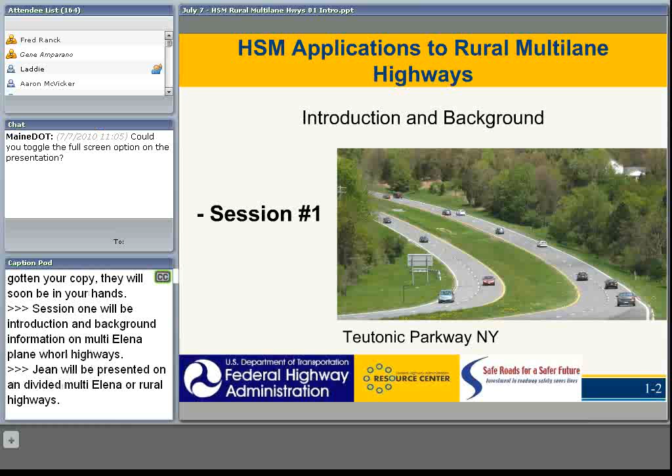Session 1 will be introduction and background information on multi-lane rural highways. Our 2 presenters today are myself, Fred Ranck, from FHWA's Resource Center, and Gene Amparano, who will be giving the following session on undivided rural multi-lane highways. Our learning outcomes for the first module are to review the crash frequency safety performance of rural multi-lane highways and to define for you substantive safety, a concept that goes beyond nominal safety as we've always thought of it.

Gene, could you please advance the slides and tell me which one you're advanced to? If you go to slide 5. We're on slide 5, okay. I was experiencing a real slow internet connection, my apologies to those of you on the webinar.

Multi-lane highways are a very small portion, less than 1 out of every 5 miles of U.S. highways. They constitute a small amount of the U.S. federal aid mileage, not a large share at all.

Fred? Yes, I'm bringing up, I'm with Gene. I've totally lost the internet connection here, so I'm going to call on you to advance the slides as soon as I can get up and see them in my hand here. Just say next and I'll advance the slide. Sure.

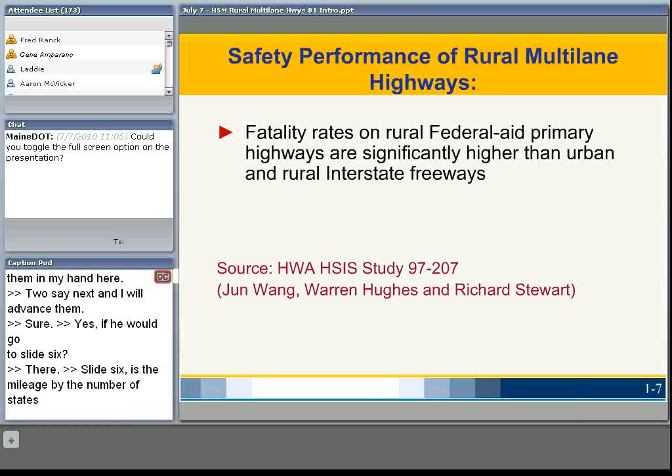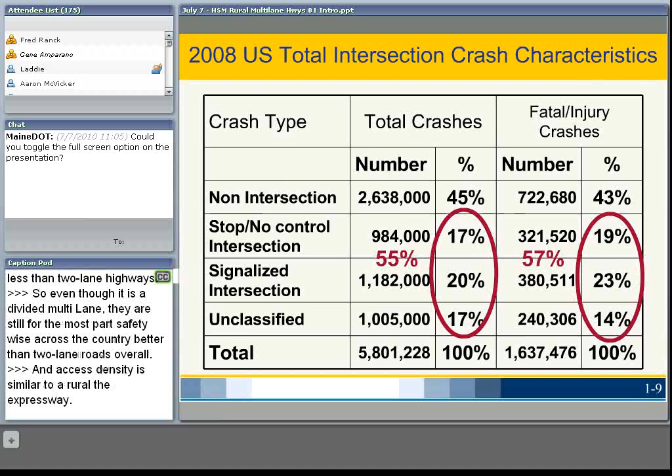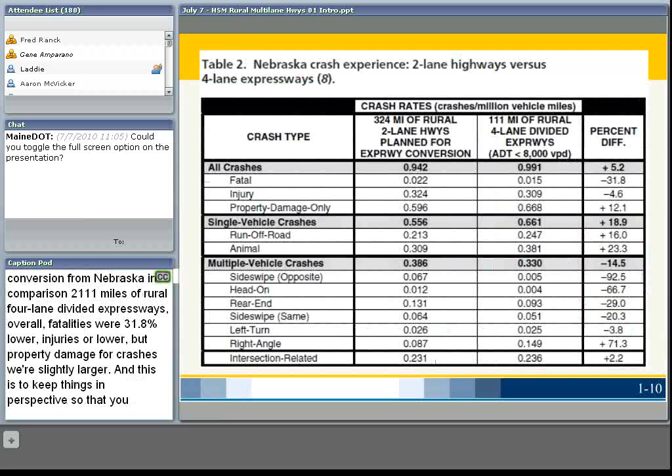Slide 10. A comparison from NCHRP 650 shows crash rates for 324 miles of rural 2-lane highways planned for expressway conversion in Nebraska, compared to 111 miles of rural 4-lane divided expressways. Overall, fatalities were 31.8% lower, injuries were lower, but property damage crashes were slightly larger. This helps keep things in perspective so you understand how they relate to the performance of other roadways.

Our knowledge as engineers and transportation professionals remains imprecise. Judgment is essential. Meeting the standard of your design standards or the MUTCD does not necessarily make a highway safe. Some important features of highways are not determined by standards, such as the spacing of interchanges or intersections, for J-turns, or angled positive offset left turn lanes. All of these things are not typically found in our national standards.

On the left-hand side, we've typically thought in the past, up until about the mid-1990s, of safety as complying with the minimum requirements of our design standards for things such as vertical curvature, horizontal curvature, cross slope, super elevation, length of tangents, and tapers. As long as we met those, a road was thought of as being nominally safe - in other words, safe in name only.

Since the mid-1990s, a different way of looking at safety and crash frequency performance in a more progressive manner has evolved, and we call this substantive safety. Substantive safety is the expected or actual crash frequency or severity for a piece of roadway or highway.

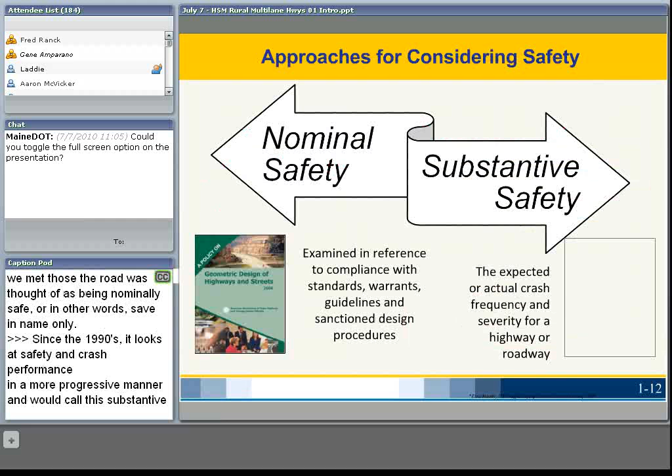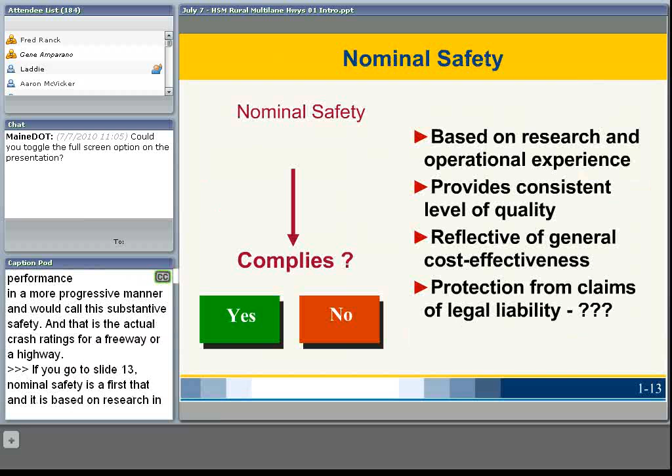Go to slide 13. Nominal safety is a first step, and it's based on research and our past experience in the United States, and what has built our design standards to be what they are today. I'd like you to think of it as a first step: do you meet the minimum values? Do you comply with the minimum requirements of your design standards?

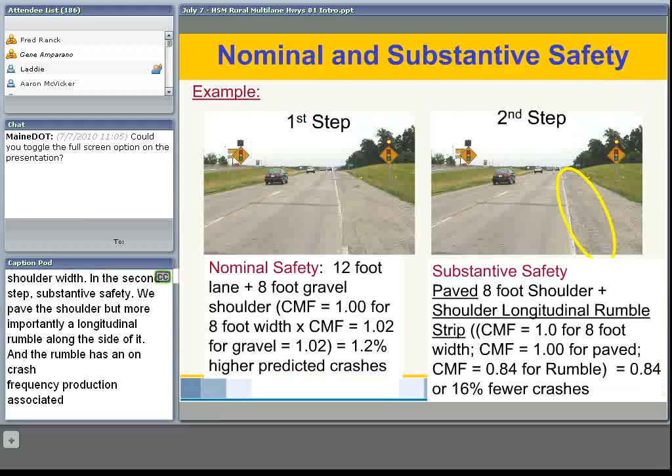Go to slide 14. In the first step, nominal safety, looking at this divided 4-lane piece of highway in Missouri, US 54, we have 12-foot lanes and 8-foot gravel shoulders, and we would typically think of this as meeting all the nominal requirements for lane width and shoulder width. In the second step, substantive safety, we pave the shoulder, but more importantly, we add a longitudinal rumble strip along the side of it. Rumble strips have a known crash frequency reduction of about 16% fewer crashes. Going beyond nominal, such as installing a longitudinal rumble, can reduce crash frequency.

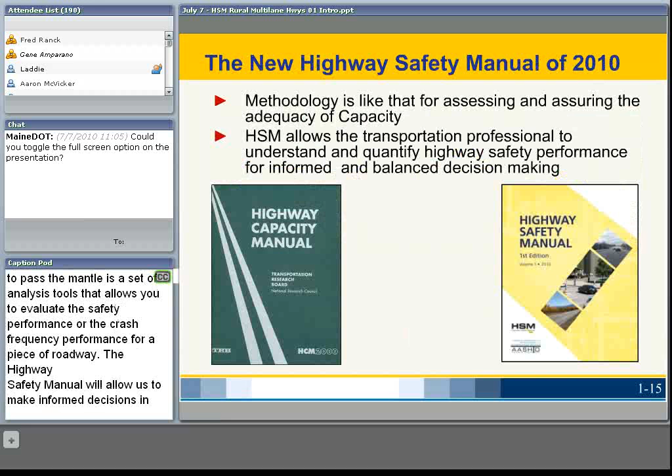Slide 15. The new Highway Safety Manual of 2010 has a methodology a lot like that of the Highway Capacity Manual. The Highway Safety Manual is a set of analysis tools that allows us to evaluate the safety performance, or the crash frequency performance, for a piece of roadway. The Highway Safety Manual will allow us to make informed decisions in terms of what types of designs will result in differing crash frequencies. It allows for more balanced decision making.

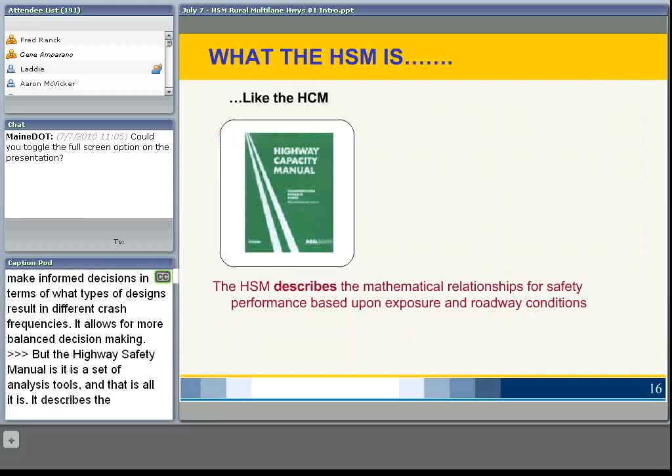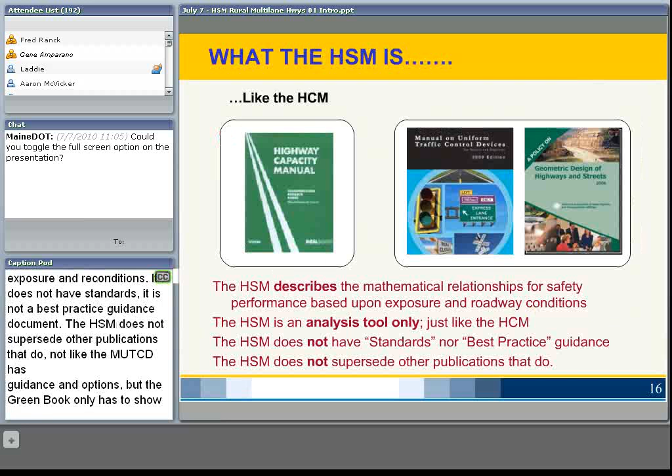Go to slide 16. The Highway Safety Manual is a set of analysis tools, and that is all it is. It describes the mathematical relationships for safety performance based on exposure and roadway conditions. It does not have standards. It is not a best practice guidance document. The HSM does not supersede other publications that do - it is not like the MUTCD nor the Green Book. The MUTCD contains standards as well as guidance and options. The Green Book has only 4 standard or 'shall' requirements, and the remainder of it is guidance in terms of design of a facility.

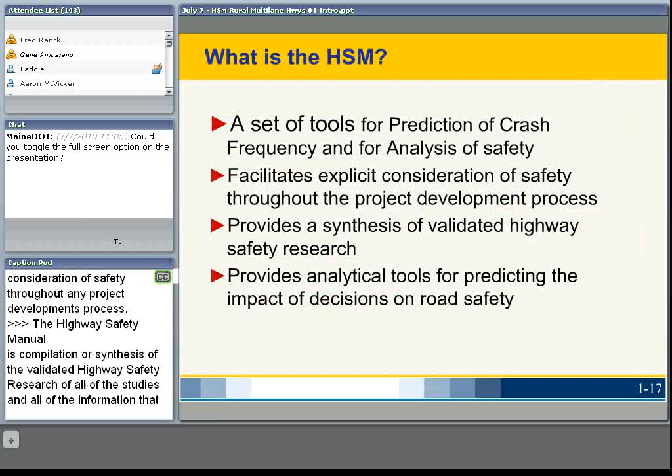Slide 17. So the Highway Safety Manual is a set of tools for the prediction of crash frequency and for the analysis of safety. It facilitates explicit consideration of safety throughout any project development process. The Highway Safety Manual is a compilation, a synthesis of the validated highway safety research of all the studies and information available to you, the transportation professional. It provides analytical tools to predict the impact of decisions on road safety. Slide 18. So the Highway Safety Manual contains the best of the known science of safety and research.

We have for some time been able to evaluate and quantify environmental impacts such as number of acres of wetlands disturbed. Operationally, we can compute levels of service and total delay for an intersection project. We can certainly do the economic analysis on costs and benefits, but what we haven't been able to do until the advent of the Highway Safety Manual is to be able to quantify safety performance.

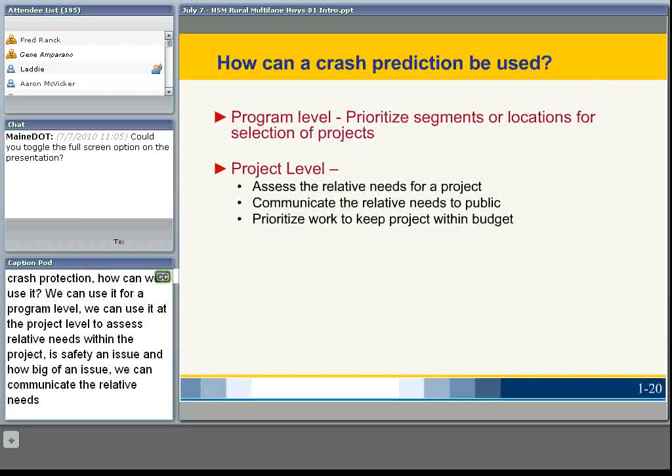So quantifying safety for crash prediction, how can we use it? We can use it at the program level to prioritize segments or locations. We can use it at the project level to assess relative needs within a project. Is safety an issue? How big of an issue? We can communicate the relative needs in terms of crash frequency performance to the public, and it provides an excellent way of supporting documentation for design exceptions.

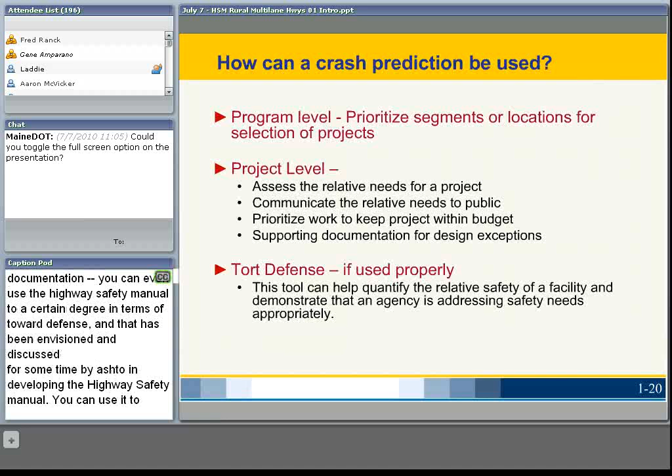You could even use the Highway Safety Manual to a certain degree in terms of tort defense, and that's been envisioned and discussed for some time by AASHTO in developing the Highway Safety Manual. You can use it to quantify the relative safety of the facility and demonstrate that an agency is addressing safety needs appropriately.

FHWA has made it a policy, in the form of a program memorandum, that safety be fully considered in every aspect of planning, programming, environmental analysis, project design, construction, maintenance, and operations, and FHWA acted to do that back in January of 2005. So the methods, the methodology, and the results of the Highway Safety Manual should be incorporated into the work of your agency as you develop a project and make decisions.

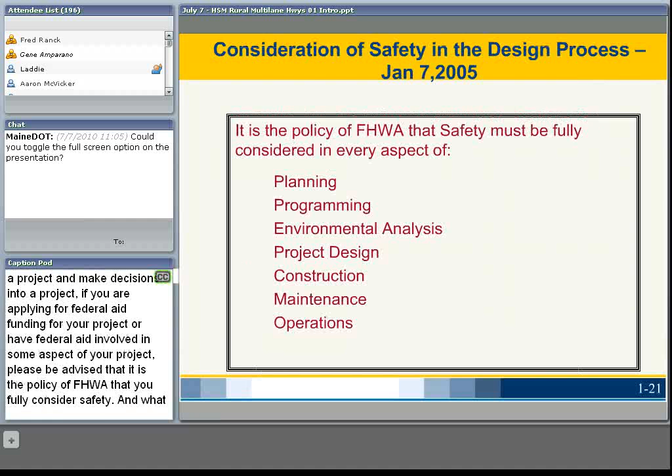If you're applying for federal aid funding for your project, or have federal aid involved in some aspect of your project, please be advised that it is the policy of FHWA that you fully consider safety. In terms of that, what that means is to use the methodology and the proven analysis techniques of the Highway Safety Manual to quantify it.

Balancing safety with many other factors is critical to good design decision making. With being able to quantify safety, we can now bring it into the balance of how decisions are made overall in the project.

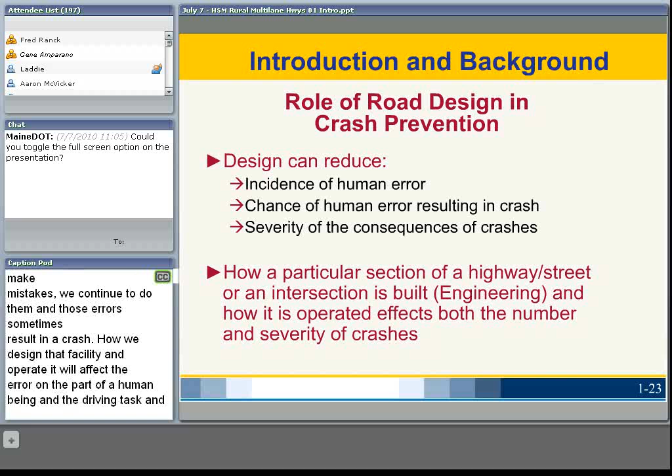The role of road design in crash prevention: design can reduce the incidence of human error. Humans will always continue to err in the driving process. The human brain is a parallel processor, and inherent in parallel processors is branching to not the same decision reliably all of the time. We know that drivers make mistakes, they continue to do them, and those errors sometimes result in a crash. How we design a facility and operate it affects whether that error on the part of the human being in the driving task results in a crash, and how severe that crash will be.

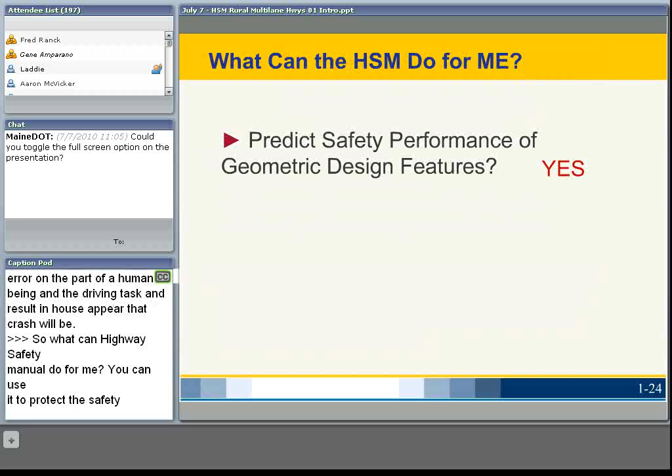So what can the Highway Safety Manual do for me? You can use it to predict the safety performance of geometric design features such as shoulder width, side slope, and access. You can use it to quantitatively calculate safety effects, and to predict safety performance for intersections in terms of crash frequency and the effects of countermeasures. You can use it for better decisions for safety, and that's what we're seeking with the Highway Safety Manual and its deployment.

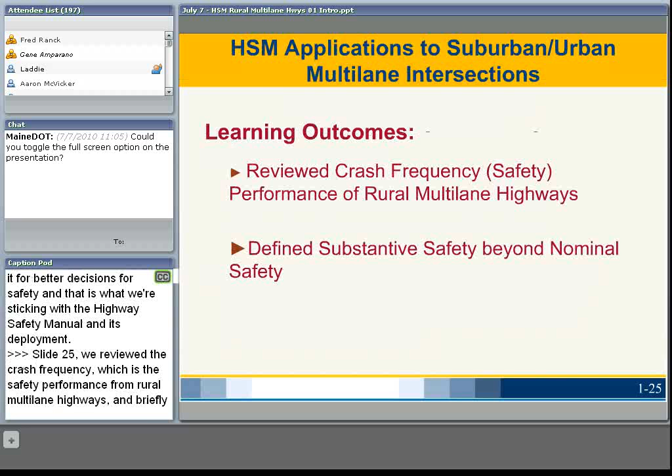We reviewed the crash frequency, that is the safety performance, for rural multi-lane highways, and briefly covered the new term, substantive safety, which goes well beyond previous thinking, which we'll identify as nominal safety.

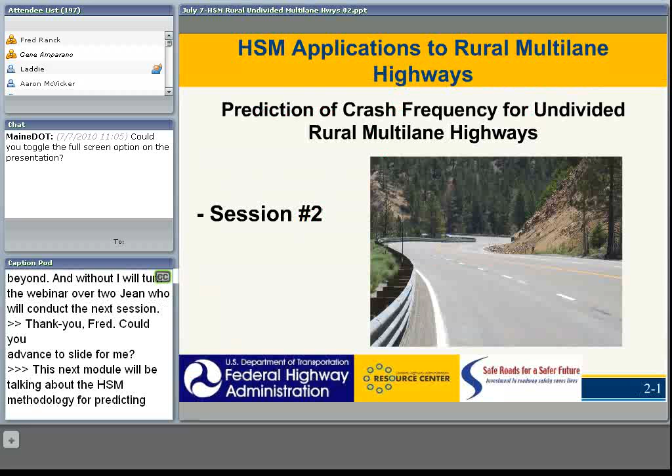And with that, I'll turn the webinar over to Gene Amparano, who will conduct the next session. Thank you, Fred. You want to advance the slides for me? Okay, I was just teasing you, Fred.

This next module, we're going to be talking about the HSM methodology for predicting crash frequency for undivided rural multi-lane highways. We're going to describe the base models, better known as the safety performance functions, that are used to calculate this predicted crash frequency. We're also going to describe and look at the crash modification factors associated with rural undivided multi-lane highways, and show you through demonstration how to apply the crash modification factors.

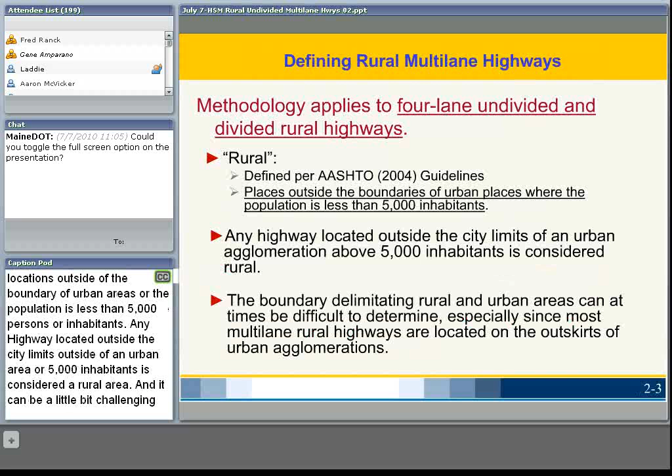First, we want to define what a rural multi-lane highway is. Rural is defined as locations outside the boundaries of urban areas where the population is less than 5,000 inhabitants. Any highway located outside the city limits of an urban agglomeration above 5,000 inhabitants is considered a rural area. It can be a little challenging to differentiate between rural and urban areas in some places, but usually they're on the outskirts of urban agglomerations.

Multi-lane facilities usually have 4 or more lanes with a continuous cross-section. They may be divided or undivided, with a rigid barrier or flexible barrier, or just a paved or landscaped median. They should not have access or egress limited by grade-separated interchanges, meaning they should not be freeways, but occasional grade-separated interchanges are acceptable as long as they're not the primary form of access.

There are some limitations on the methodology. The Highway Safety Manual covers a lot of geometric and traffic control features, but not all. As you go through your copy of the Highway Safety Manual, once you get it, you will see that there are some areas that are lacking, that are not addressed with a crash modification factor.

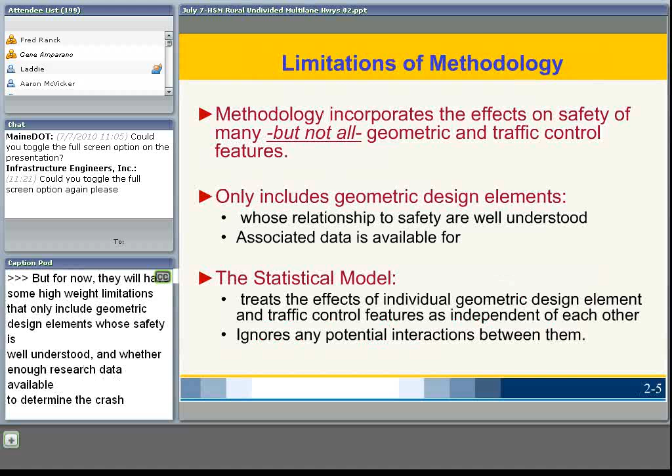But the Highway Safety Manual is a living document, similar to the MUTCD and the Highway Capacity Manual. As research advances, there will be more crash modification factors that come on board to be included in future editions of the Highway Safety Manual. But for now, we have some limitations. It only includes geometric design elements whose relationship to safety are well understood and where there's enough research data available to determine those crash modification factors.

It treats the effects of individual geometric design elements and traffic control features as independent of each other, and it ignores any potential interaction between them.

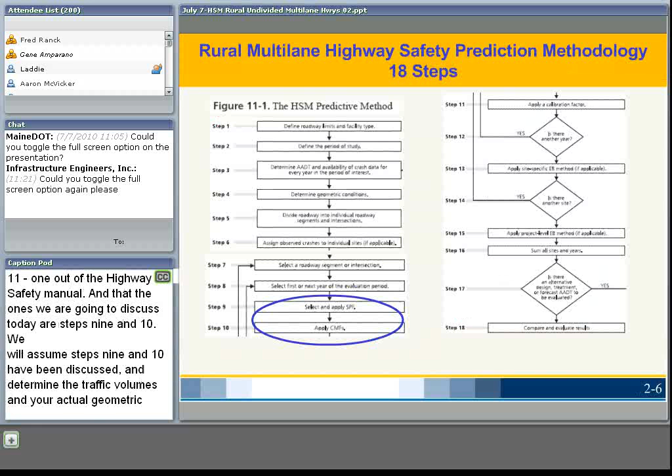The crash prediction methodology consists of 18 steps. This happens to be Figure 11-1 out of the Highway Safety Manual. Basically what we're going to discuss today are steps 9 and 10. We're going to assume that steps 1 through 7 have already been completed, which means defining the roadway limits, defining the study period, determining your traffic volumes and your actual geometric conditions, and observing the data. We're assuming that's already taken place.

The following steps after steps 9 and 10 have to deal with calibration. There is a calibration sequence in Appendix C of the Highway Safety Manual that walks you step by step on how to calibrate. If you were able to participate in the first webinar on June 14th, we showed the process that's used for calibration, and a copy of that presentation is available at the conclusion of today's webinar.

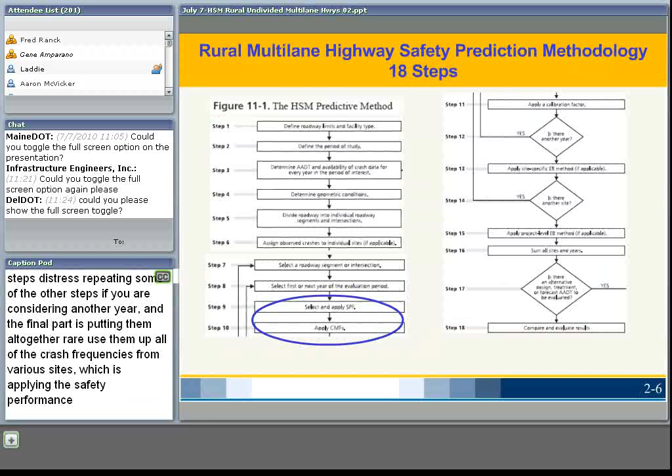The remaining steps just repeat some of the earlier steps if you are considering another year or another site, and the final part is putting it all together, where you sum up all your crash frequencies from various sites. But today we're going to be focusing on steps 9 and 10, which is applying the safety performance functions and also applying the crash modification factors to a rural multi-lane highway.

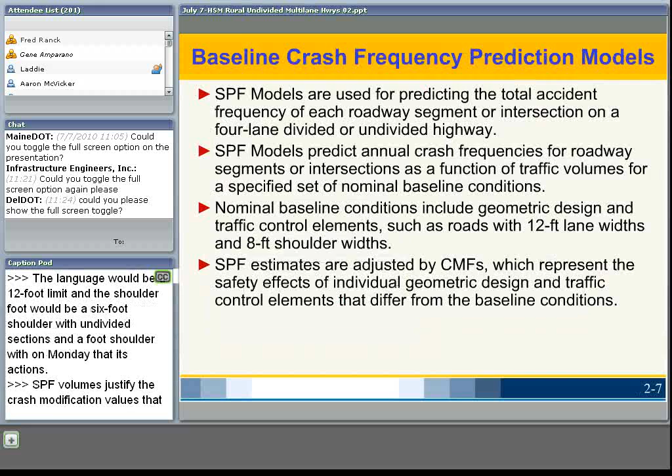The SPF models, or safety performance functions, are used for predicting the total accident frequency on a roadway segment. The prediction is determined in crashes per year. They're based on a set of nominal baseline conditions for geometric design and traffic control elements, such as for lane width, the base condition would be a 12-foot lane width, and for shoulder width, it would be a 6-foot shoulder width on undivided segments and 8-foot shoulder width on divided segments.

SPF values, or the estimates, are adjusted by the crash modification factors, which represent the safety effects of individual geometric design and traffic control elements that differ from the baseline conditions.

The first thing we have to do in order to analyze a segment of roadway is to divide it into homogeneous highway segments and also into intersections. Intersections will be covered in a webinar next week for rural multi-lane intersections. We'll cover that next week on July 13th. So if you're available, you can sit in on that presentation. But today we're going to be covering highway segments.

The definition of a highway segment can occur anywhere along a roadway, but if it happens to be between two intersections, then the segment should begin and end at the center of each of those intersections.

There's also a way to distinguish crashes with respect to roadways. They can be determined by the physical limits of the intersection, such as the curb radii or the crosswalk limits, where all those crashes that occur in Area A would be considered intersection-related crashes, and areas outside Area A, which is Area B, would be considered segment-related crashes.

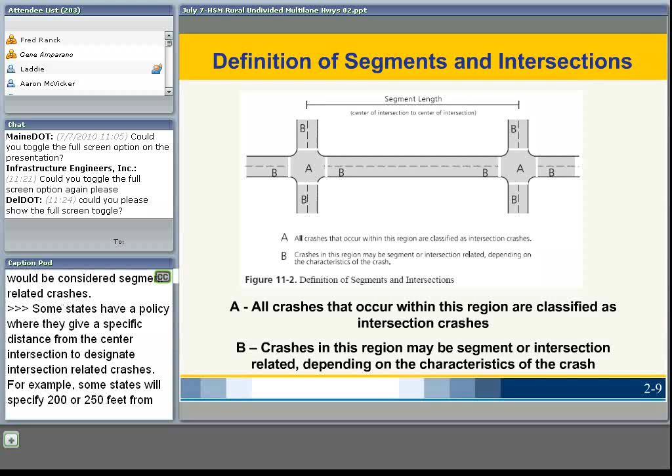Some states have a policy where they give a specific distance from the center of the intersection to designate intersection-related crashes. For example, some states will specify 200 or 250 feet from the center of the intersection to be classified as intersection-related crashes.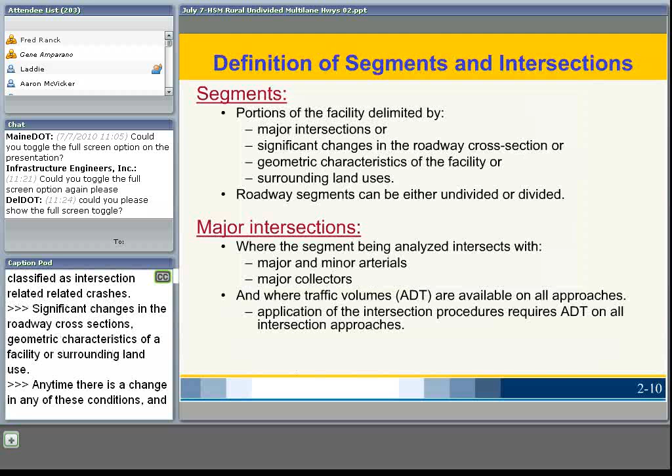Segments are the portions of the facility delimited by major intersections, significant changes in the roadway cross section, geometric characteristics of the facility, or surrounding land use. So anytime there's a change in any of these conditions, then you would want to break it out into a separate segment. Again, roadway segments can be divided or undivided.

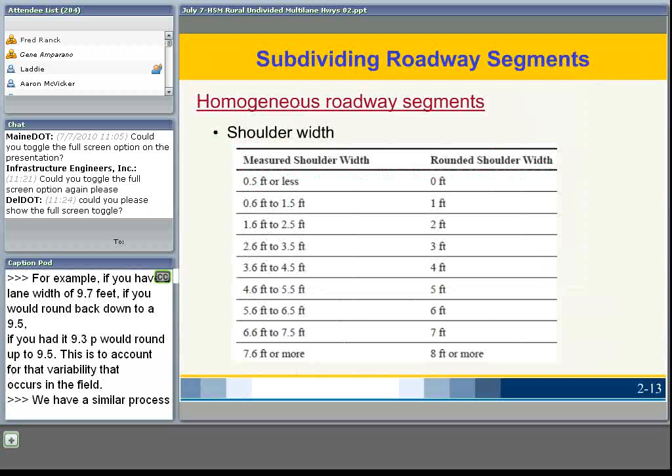To account for variability in lane width, shoulder width, and median width, a range of widths have been used to assign a rounded value for final determination of what lane width you would want to use. For example, if you had a lane width of 9.7 feet, you would round that down to 9.5. If you had a lane width of 9.3, you'd round it up to 9.5. This is just meant to account for the variability that actually takes place out in the field.

They have a similar process for shoulder widths. If your shoulder falls within a particular range of values, then you would round it up to the particular rounded shoulder width shown on the right.

For median, they also have a range of median widths where you would also round up to a particular median width.

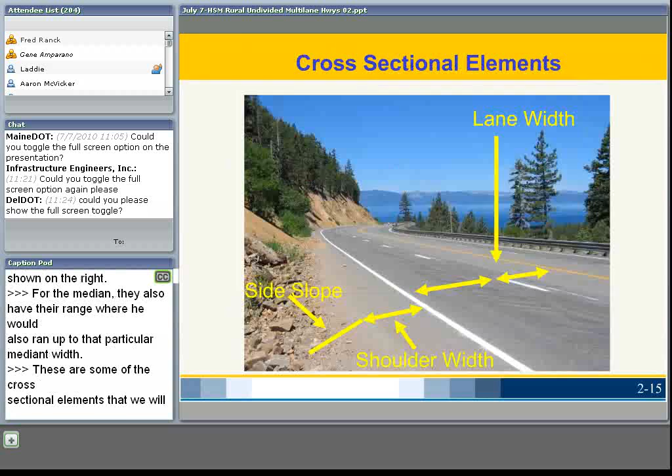These are some of the cross-sectional elements that we will be looking at that affect safety on multi-lane highways: lane width, shoulder width, and side slope. There are crash modification factors for each of these, and we'll discuss each of those.

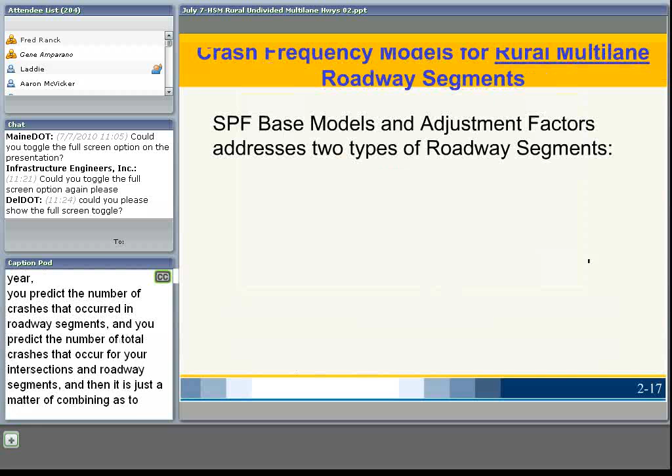To determine a crash frequency, it's basically a three-step process. You predict the number of total segment crashes per year. You predict the number of crashes that occur in roadway segments. Then you predict the number of total crashes that occur for your intersections and roadway segments. Then it's just a matter of combining those two predictions to come up with a total predicted number of crashes.

The SPF, Safety Performance Function base models, address two types of roadway segments for rural multi-lane highways: undivided and divided roadways. The models themselves are the same for divided and undivided highways, but the regression coefficients differ between undivided and divided highways.

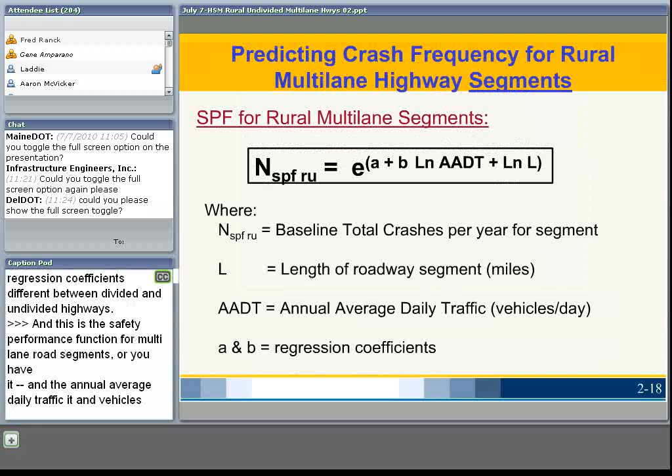This is the safety performance function for rural multi-lane segments, where you have four variables. The length of the roadway segment is in miles. The AADT is the annual average daily traffic in vehicles per day. Then you have your A and B regression coefficients, and they differ between divided and undivided.

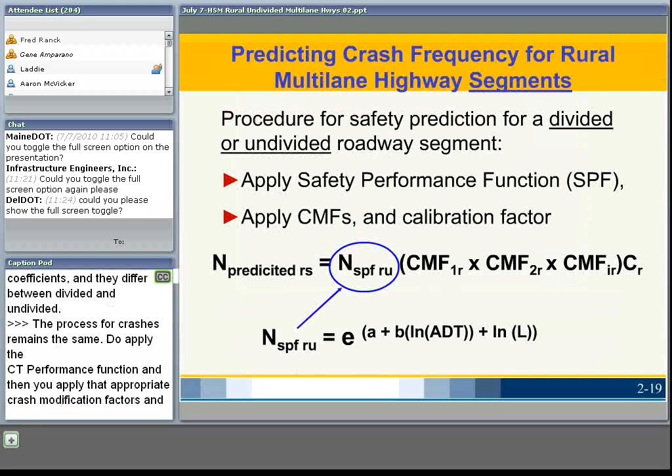The process for predicting crashes for divided or undivided remains the same. You apply the safety performance function, then you apply the appropriate crash modification factors and a calibration factor if you so choose.

Now we're going to get into the undivided rural multi-lane roadway segment, and we're going to look at the safety performance function and the A and B regression coefficients.

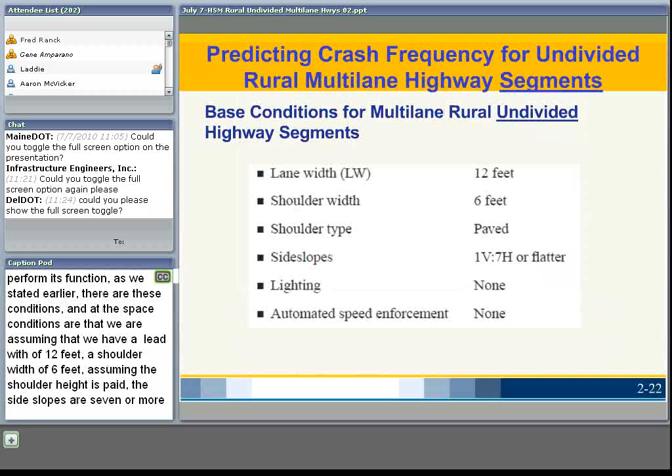With that safety performance function, as stated earlier, there are base conditions: we're assuming a lane width of 12 feet, shoulder width of 6 feet, that our shoulder type is paved, our side slopes are 1 to 7 or flatter, and that there's no lighting or automated speed enforcement present along the particular roadway segment we're analyzing.

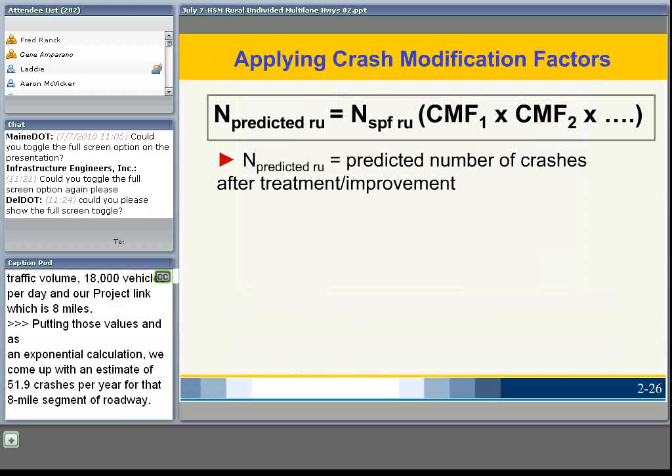And then we substitute in our values for traffic volume, 18,000 vehicles per day, and our project length, which is 8 miles. Putting those values in is an exponential calculation. We come up with an estimate of 51.9 crashes per year for that 8-mile segment of roadway.

Now to come up with our total predicted number of crashes, we have to make an adjustment from our SPF value for base conditions, and we use the crash modification factors that adjust our predicted SPF value to either existing or proposed conditions, that can be before or after a particular safety improvement.

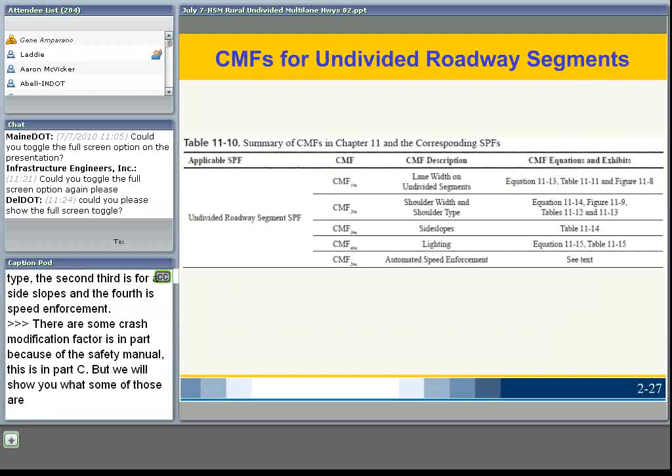These are the crash modification factors for undivided roadway segments, table 11-10 out of the Highway Safety Manual. There are 5 primary crash modification factors. The first is for lane width. The second is for shoulder width and shoulder type. Third is for side slopes. Fourth is for lighting. And the fifth is for automated speed enforcement.

And there are some other crash modification factors in Part D of the Highway Safety Manual. This is in Part C. But we will show you what some of those are at the end of this presentation. And you also, if you notice in the far right column, they provide the equation numbers and the exhibits and table numbers where you can find those crash modification factors.

Okay. I'm experiencing difficulty here myself.

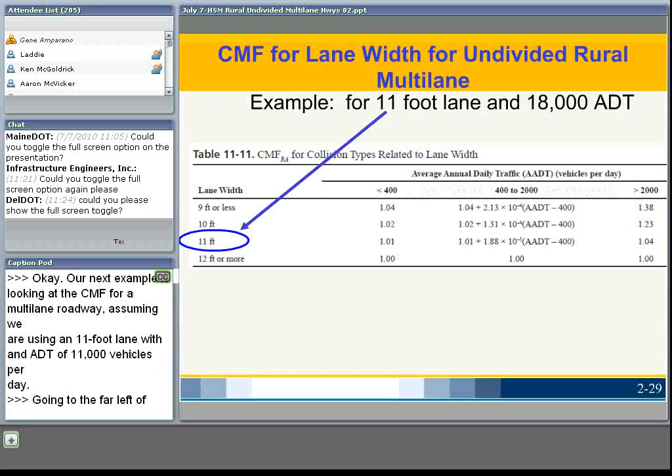Our next example is we're looking at the CMF for lane width for an undivided rural multi-lane roadway. The example is that we're using an 11-foot lane with an ADT of 18,000 vehicles per day.

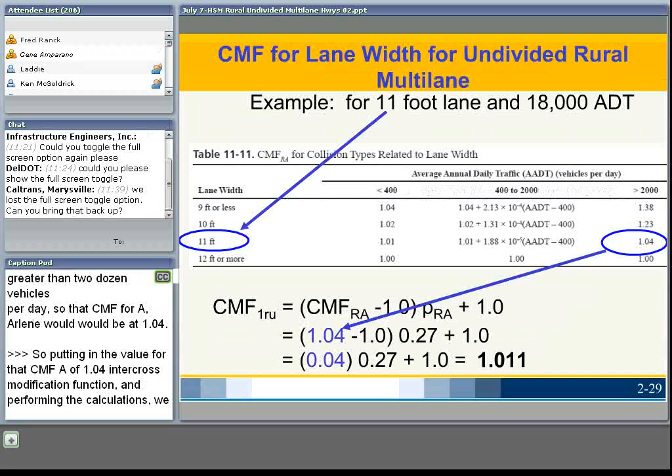So going to the far left of our table 11-11, looking at 11-foot lane width, which the CMF RA is a function of traffic volume, and we're greater than 2,000 vehicles per day, so that our CMF RA for our lane width would be 1.04. So putting in the value for our CMF RA of 1.04 into our crash modification factor function, and performing the calculation, we come up with a crash modification factor for lane width of 1.011.

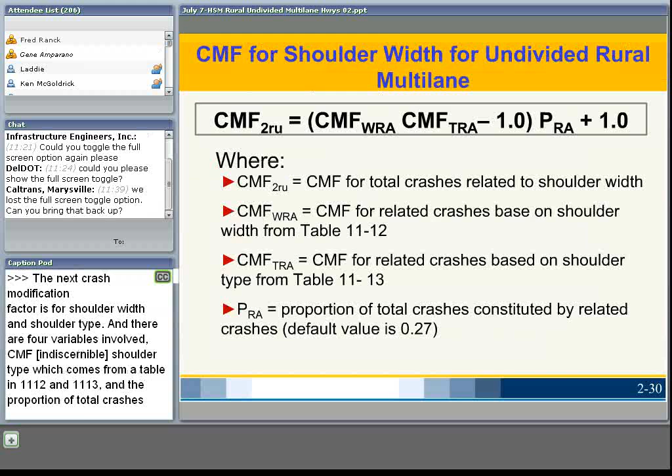The next CMF, or crash modification factor, is for shoulder width and shoulder type. There's 4 variables that are involved: CMF WRA, which is for shoulder width, CMF TRA, which is for shoulder type, which comes from table 11-12 and 11-13, and then the proportion of total crashes that's related to run-off-the-road crashes, and that is assigned a default value of 0.27.

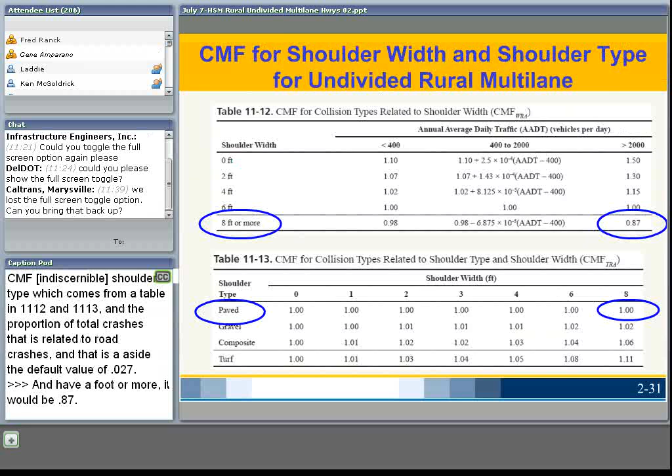So, for example, if we had a shoulder width that was 8 foot or more in width, and an ADT, or traffic volume, of greater than 2,000 vehicles per day, our CMF WRA would be 0.87. It's paved, so our CMF for TRA subscript would be 1.0. Carrying those values over into this example calculation...

We would select the particular values for the shoulder width out of table 11-12 and for the shoulder type out of table 11-13. Where you're looking at a 4-foot gravel shoulder - I thought we were looking at an 8-foot paved, but we're looking at a 4-foot gravel shoulder. Substituting those values into our crash modification function, we come up with a crash modification factor for a 4-foot gravel shoulder on a roadway segment of 18,000 vehicles per day of 1.04.

Something worth mentioning here is that if your crash modification factor is greater than 1.0, then that would lead you to expect an increase in crash frequency. So this 1.04 represents about a 4.4% estimated or predicted increase in crashes. That mainly has to deal with the shoulder width and the shoulder type.

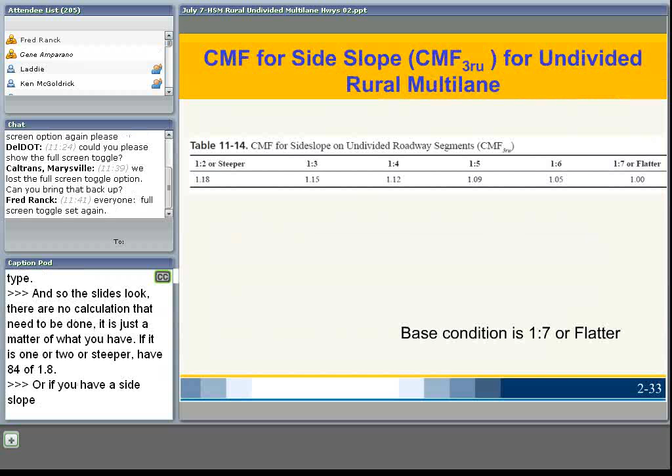For side slopes, there's no function, there's no calculations that need to be done or performed. It's just a matter of what you have. If it's 1 to 2 or steeper, you have a CMF of 1.18. For example, if you have a 1 to 5 side slope, then your crash modification factor is 1.09. And the base condition where the CMF, or crash modification factor, is equal to 1.0 is if you're at 1 to 7 or flatter.

If you have local data on the proportion of nighttime crashes, these default values should be replaced with the local data that you have available.

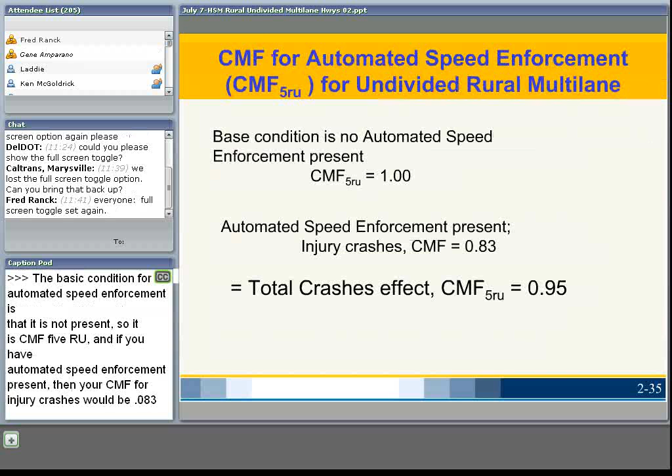The base condition for automated speed enforcement is that it's not present, so your CMF 5RU for automated speed enforcement would be 1.0. But if automated speed enforcement is present, your CMF for injury crashes would be 0.83, and for total crashes it'd be 0.95.

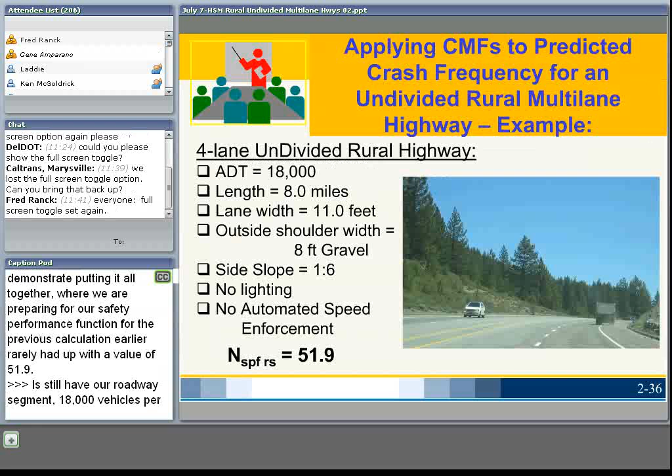Now we're going to demonstrate putting it all together, carrying forward our safety performance function value of 51.9 from the previous calculation. We still have our roadway segment: a 4-lane undivided rural highway, 18,000 vehicles per day, 8 miles in length, 11-foot lane width, 8-foot gravel shoulder, a side slope of 1 to 6, and we're assuming there's no lighting and no automated speed enforcement.

For lane width, from table 11-11, our CMF RA would be 1.04. Putting that value into our CMF function for lane width, we calculate a CMF for an 11-foot lane as being 1.011.

For an outside shoulder width of 8 feet, which is gravel, from table 11-12, our CMF WRA for shoulder width is 0.87, meaning we'd expect a reduction in crashes since our base value is 6 feet and we're at 8 feet. However, since our shoulder type is gravel, our value from table 11-13 for CMF TRA is 1.02, which is greater than 1, so we could expect about a 2% increase in crashes. Combining those two values to calculate our final CMF for shoulder width and shoulder type, our value is 0.97.

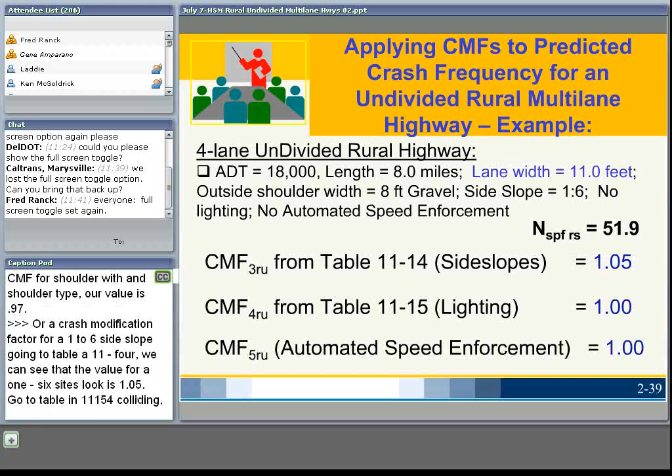For the crash modification factor for a 1 to 6 side slope, going to table 11-14, we can see that the value for a 1 to 6 side slope is 1.05.

Going to table 11-15 for lighting, assuming there's no lighting, our default CMF is 1.0. If automated speed enforcement is not present, again our CMF would be 1.0 for the base conditions.

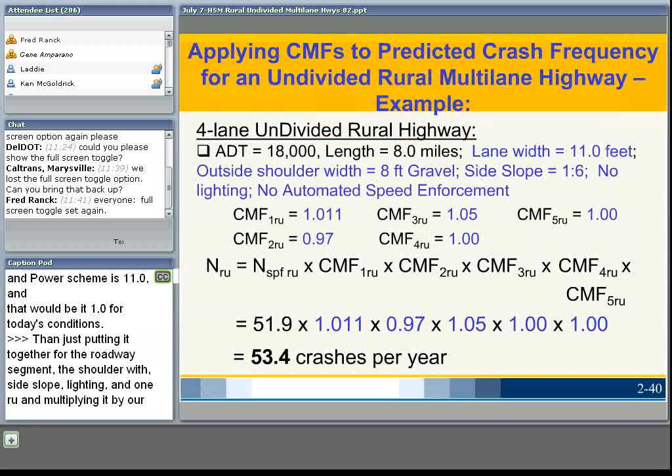Putting it all together for the roadway segment, our CMFs for lane width, shoulder width, side slope, lighting, and speed enforcement are crash modification factors 1RU through 5RU. Multiplying that times our SPF predicted value of 51.9, we come up with a total predicted number of crashes for that segment of 53.4 crashes per year.

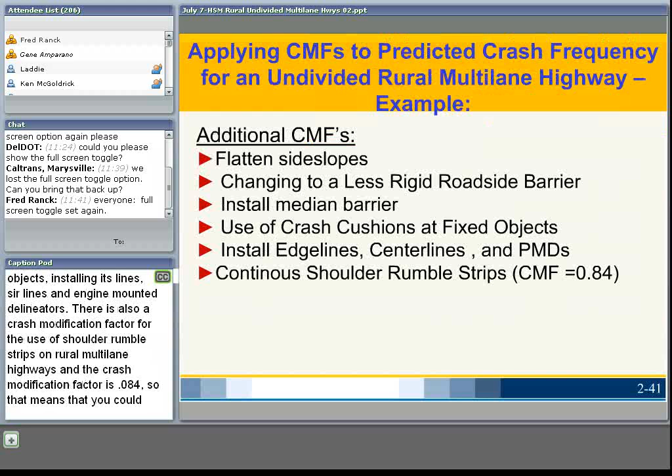As I said earlier, there are additional crash modification factors in Part D of the Highway Safety Manual. They cover flattening side slopes along a roadway, changing from one type of barrier to a less rigid barrier, installing a median barrier along a roadway segment, using crash cushions at fixed objects, and installing edge lines, center lines, and post-mounted delineators.

There's also a crash modification factor for the use of shoulder rumble strips on rural multi-lane highways. That crash modification factor is 0.84, meaning you could expect about 16% fewer crashes on a segment that has shoulder rumble strips versus one that doesn't.

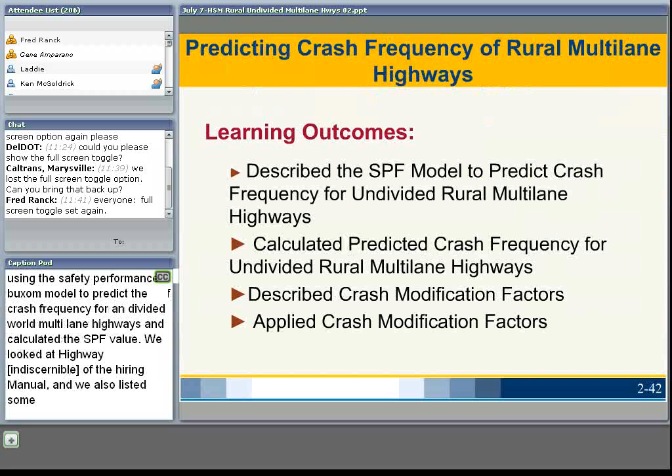What we did is walk you through the process of using the safety performance function model to predict crash frequency for an undivided rural multi-lane highway. We calculated the SPF value, looked at the main crash modification factors in Part C of the Highway Safety Manual, demonstrated their application, and also listed some of the other crash modification factors available in Part D.

That concludes this session, and the next session will be Fred, where he will discuss the crash frequency method for divided rural multi-lane highways. Fred?

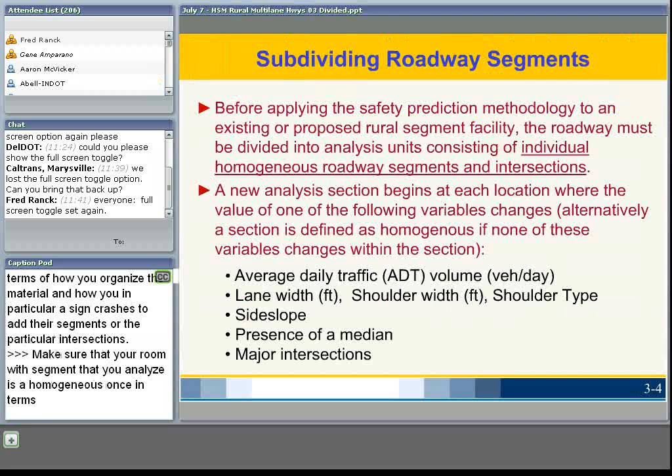Before we apply them, you need to get organized and be logical and precise. One of the things about using the Highway Safety Manual is you need to think functionally in terms of how you organize the information and the material, and in particular, how you assign crashes to either the segments or to the intersections.

Make sure your roadway segment that you're going to analyze is a homogeneous one in terms of ADT, lane width, shoulder type, side slope, and presence of any median. Typically we'll start a new analysis section where one of those values changes, or at a major intersection.

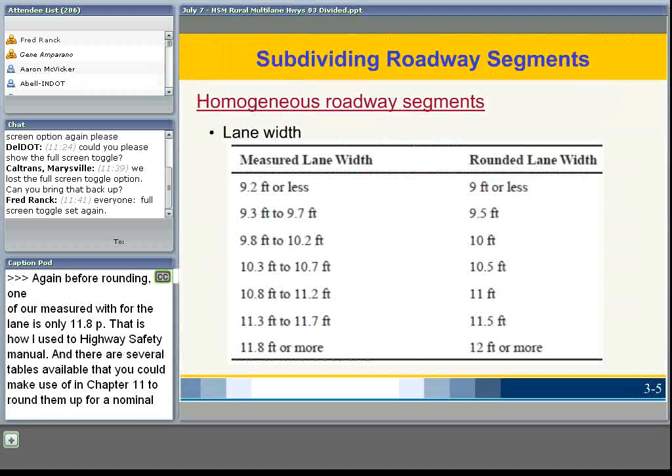Again, for rounding, what if my measured width on a lane is only 11.8 feet? How do I use the Highway Safety Manual? There are several tables available from Chapter 11 that you can use to round them up to a nominal value for use in the Highway Safety Manual equations. In the case of an 11.8 foot wide lane, you'd use 12 feet.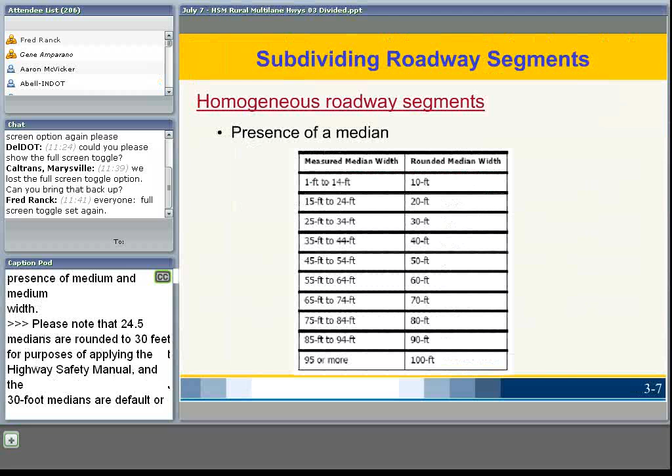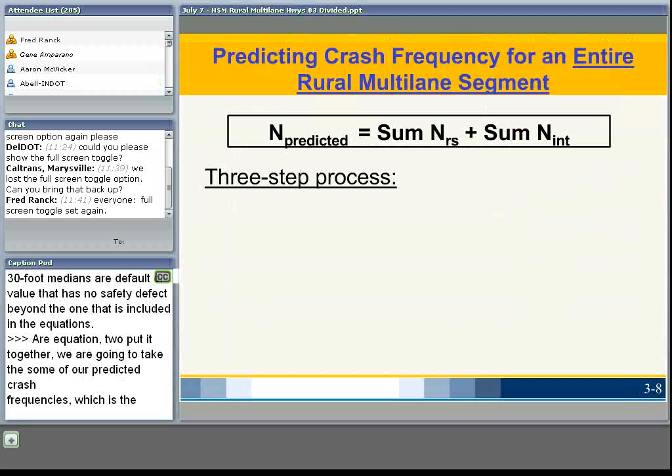For shoulder width, again rounding, if the shoulder is 4.6 feet, round it up to 5 feet as an example. The same applies with the presence of a median and median width. Please note that 25 to 34 foot wide medians are rounded to 30 feet for purposes of applying the Highway Safety Manual, and that the 30 foot median is our default value that has no safety effect beyond the one included in the equations.

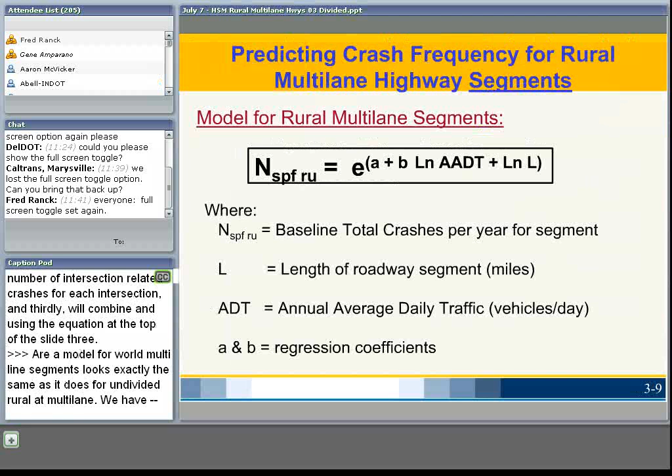Our equation, to put it together, is to take the sum of our predicted crash frequencies - the predicted number of crashes for our road segments and for our intersections - and add them together for the entire project. First we'll predict the total roadway segment crashes, then predict the number of intersection-related crashes for each intersection, and third, combine them using the equation at the top of slide 3-8.

Our model for rural multi-lane segments looks exactly the same as for undivided rural multi-lane. We have natural E, raised to a power of A plus B natural log of the ADT, plus the natural log of the length in miles of our segment being analyzed. It looks the same, but what differs is the coefficients.

So first we apply the base model, then we apply CMFs and any calibration factor. We'd do that with our safety performance function, sub SPF RU for road segment, our base model, and then apply any of the appropriate CMFs and a calibration factor.

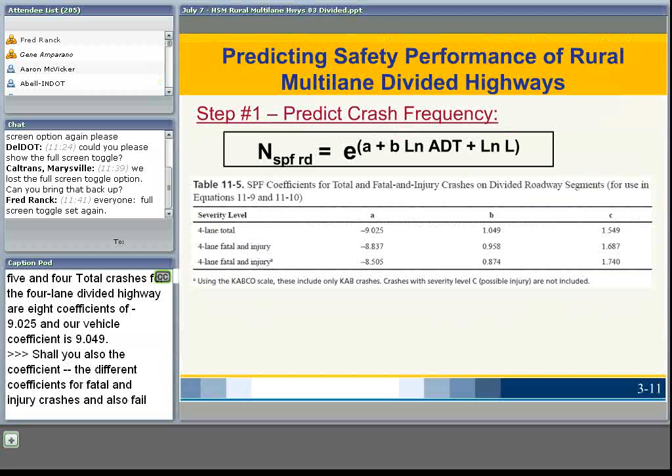Our equation coefficients are from table 11-5, and for total crashes for 4-lane divided highways, our A coefficient is minus 9.025, our B coefficient is 1.049. I'm also showing you in table 11-5 the different coefficients for fatal and injury crashes, and also fatal and injury crashes if you use the KABCO scale, which is included in table 11-5.

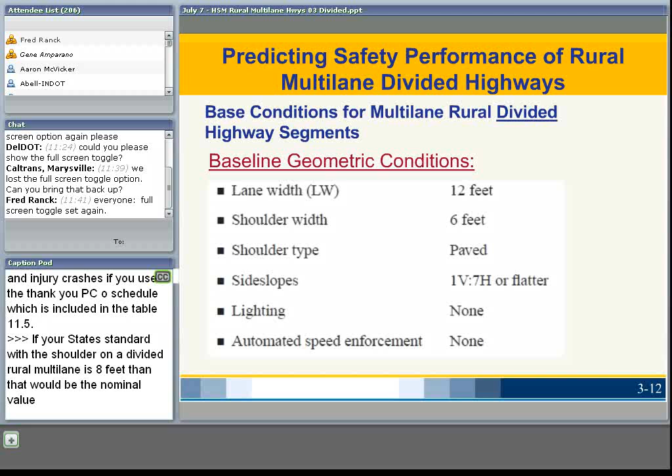Our baseline conditions are 12-foot lanes, 6-foot wide shoulder - now this is on a divided highway. If your state's standard width for shoulder on a divided rural multi-lane is 8 feet, then that would be the nominal value you would assume for baseline conditions. Shoulder type is paved, 1 to 7 or flatter side slopes, no lighting, no automated speed enforcement.

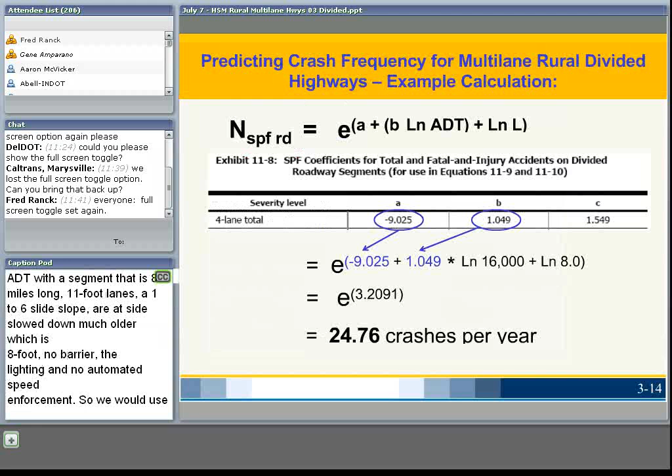Now, at this point, I want to stop and ask and make sure you understand. The Highway Safety Manual reflects in a rigorous and quantitative way the relationships that you, as a transportation professional, have come to know in your work.

The example that Gene provided in his session 02 was for the same 8.0 mile long segment at 16,000 ADT, and if you'll remember, the predicted number of crashes for the undivided version was 45.17 crashes per year. Yet here, the segment we're looking at only differs by one thing: it's divided. And divided highways are inherently safer than undivided.

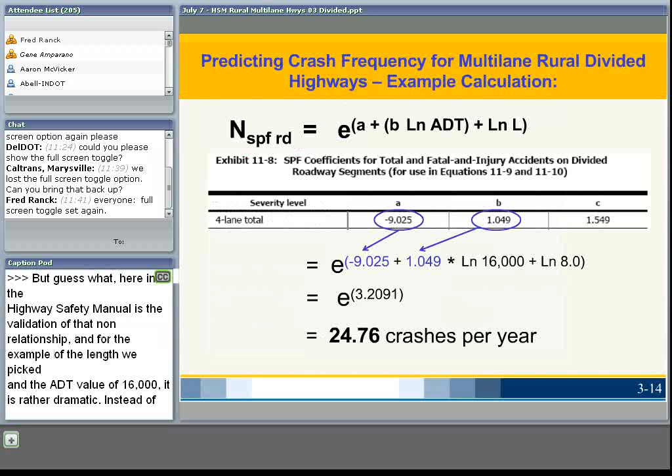That's one of the principles of highway and transportation engineering. Here in the Highway Safety Manual is the validation of that known relationship. For the example of the length we picked and the ADT value of 16,000, it's rather dramatic: instead of having 45.17 crashes per year predicted, we have 24.76 when we have a divided highway for the same ADT and for the same length.

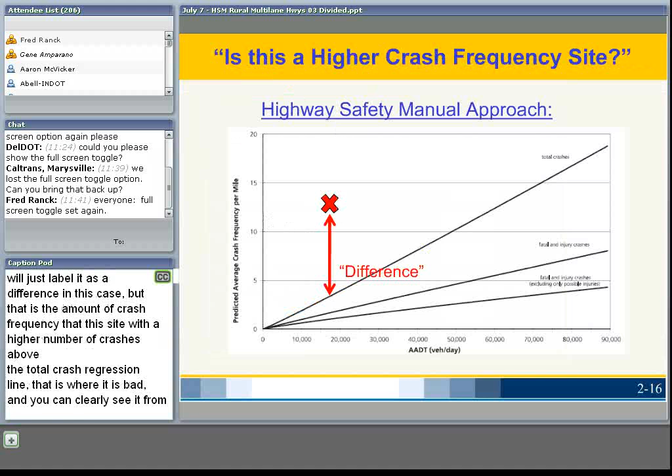One of the values of the Highway Safety Manual is that with a fairly quick calculation, with a handheld calculator or a spreadsheet, you can get a feel for what's the norm, where's the average through the middle of the data set, of these huge data sets assembled to develop the Highway Safety Manual, and where my site or project is in relation to the middle of the data set, which is represented by the regression line, the black line for total crashes.

That difference, I'll just label it as difference in this case, is the amount of crash frequency that this site has above the total crash regression line. You can clearly see from this example this site is quite a ways away from the regression line, and hence has a more acute safety need.

As Gene provided for undivided highway segments in the previous session, Table 11-6 provides the default crash distribution by collision type. Each of these columns, the column for total, for fatal and injury, for PDO, adds up to 100%. What's not provided is the relationship of total crashes to fatal and injury crashes to PDO.

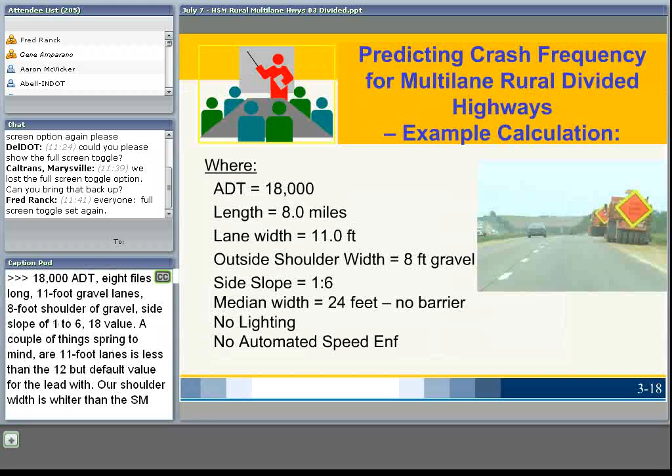For example, for a divided highway, and on the right you'll see the picture, this is actually a photograph from Iowa that uses 8-foot gravel shoulders on their divided highways: 18,000 ADT, 8 miles long, 11-foot wide lanes, 8-foot gravel shoulder, side slope 1 to 6, and median width is 24 feet. A couple of things spring to mind.

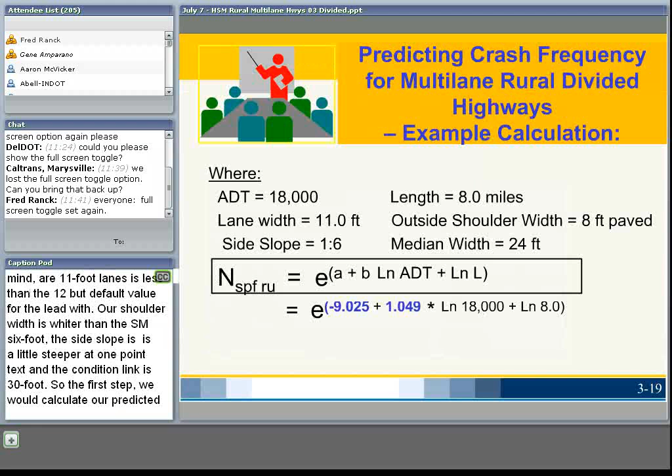Our 11-foot lane is less than the assumed 12-foot default value for lane width. Our shoulder width is wider at 8 feet than the assumed 6 foot. Side slope is a little steeper at 1 to 6 than the 1 to 7 assumed for baseline conditions, and the baseline condition for median width is 30 feet.

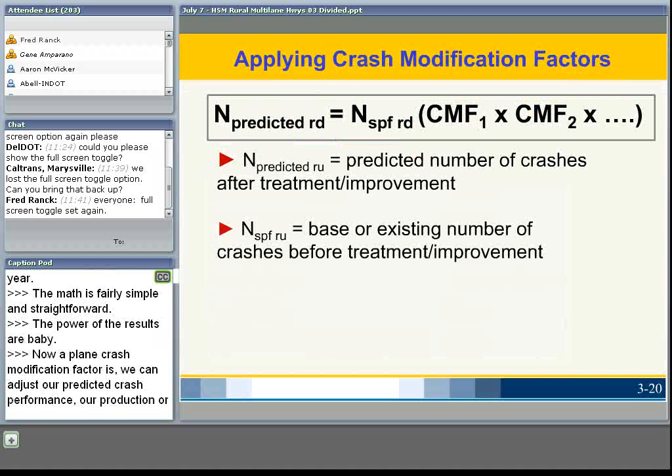So first step, we would calculate our predicted crashes for this length of highway segment using our SPF equation. We would then use the A and B coefficients for divided highways, and we predict about 28.01 crashes per year. The math's fairly simple and straightforward. The power of the results are big.

Now, applying crash modification factors, we can adjust our predicted crash frequency to the conditions that actually exist for our segment, where they differ from the assumed baseline conditions. In the case for lane width, we had an 11-foot lane, and we're above 2,000 ADT, so our adjustment factor would be 1.03.

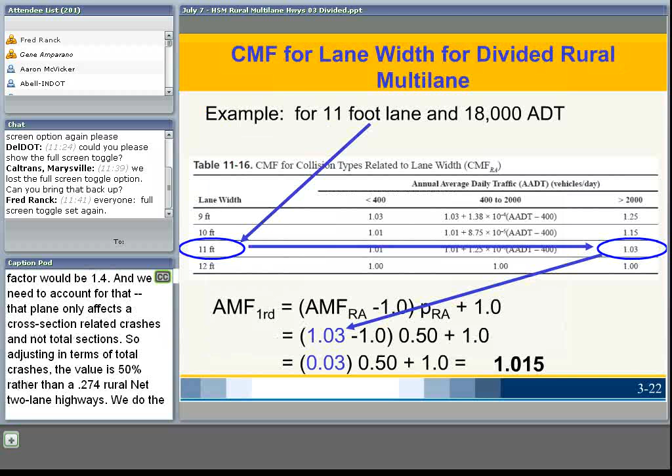We need to account for the distribution of crashes, just as we did for undivided highways. Lane width only affects cross-section related crashes and not total crashes. So adjusting pRA in terms of total crashes, the value is 50% rather than 0.27 for rural two-lane highways. And we do the math, and we end up with a CMF for lane width of 1.015, or 1.5%.

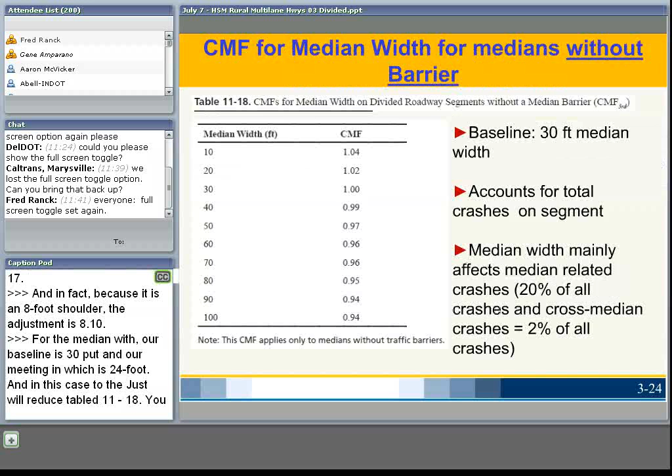For shoulder width, and we had an 8-foot shoulder, the adjustment is straightforward, and we just use the value off of Table 11-17.